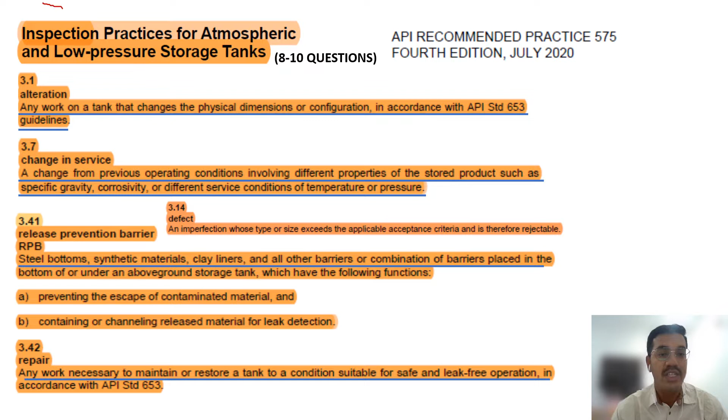First you need to understand what is meant by inspection practice. If you want to read API 650 and 653, construction and in-service inspection, before that you should read API 575, because this is the basic of API 650, in order to understand what API 653 is.

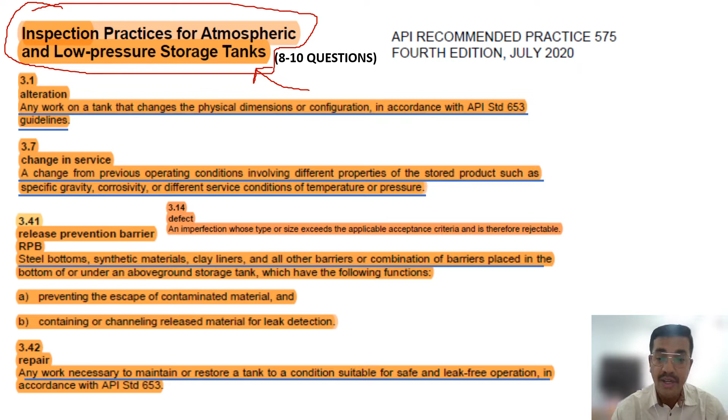If you go for other APIs like API 510, pressure vessel, you will read API 572, which is also a recommended practice.

API 653's recommended practice is API 575, which gives you guidelines and overall idea of what 650 and 653 are. Part of API 571, part of API 650, part of API 653 - everything you will find in API 575, because it gives all the info.

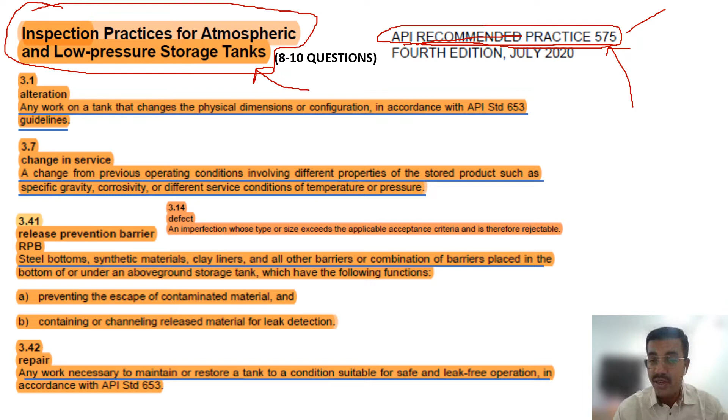Similarly for pressure vessels, API 510 has API 572. And if you go for API 570, that is piping inspection, you will find API 574. Similarly for API 580 RBI, you will find 581. So for each and every API construction and in-service inspection code, there is a recommended code also.

Similarly for API 650 and 653, the recommended practice code is API 575. It is nothing but a summary, a gist, an overall idea of a tank - what types of tanks are there, what possible defects happen in the tank, how to do the inspection of tanks.

What are the requirements? You will not find the exact values - the exact values are in 650. Construction, during construction, what will be the requirements? During inspection, in-service inspection, re-rating, reconstruction, relocating - what are the requirements? That is different, that is the exact requirements, but API 575 gives you an overall idea.

API 575 will give you an overall idea for tanks. That's why it is called recommended practice. It is not a guideline, it is not a mandatory guideline. It is a recommended practice in which you get the overall idea of API 650 and 653.

So what do you mean by alteration? Alteration we already talked about in API 650 and 653, both areas we already covered. Alteration means any work on a tank that changes the physical dimension or configuration.

Physical dimension means change of height - you add the shell, you remove the shell. Configuration - change of bottom plate - this is called alteration. Minor cutting is not called an alteration. In tank terms, you have to remember alteration is change of height or change of the bottom plate, not a cutting of an area.

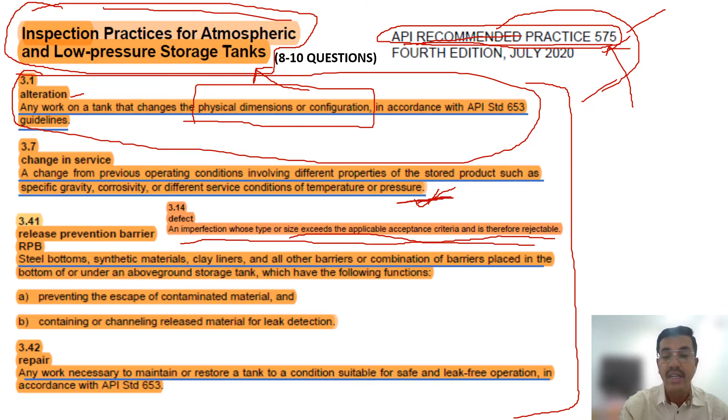So reportable indication, recordable indication - if you remember, I have already covered all these things. Reportable means an indication, maybe it is a defect, maybe not a defect. If we find the size exceeds the applicable acceptance criteria, then we call it a defect and it is rejectable. A defect is a recordable indication, but an imperfection or indication is not recordable.

So an imperfection whose type or size exceeds the applicable acceptance criteria is therefore rejectable. So release prevention barrier - this is important, sometimes it comes in the exam.

Steel bottoms, synthetic material, clay liners, and all other barriers or combination of barriers placed in or under the above ground storage tank, which have certain functions. Steel bottoms - this usually comes in open book questions.

Steel bottoms, synthetic materials, clay liners, and all other barriers - what is the function of these? Preventing the escape of contaminated materials.

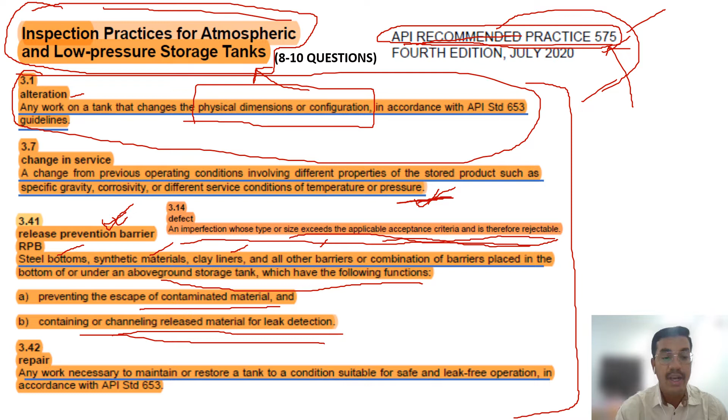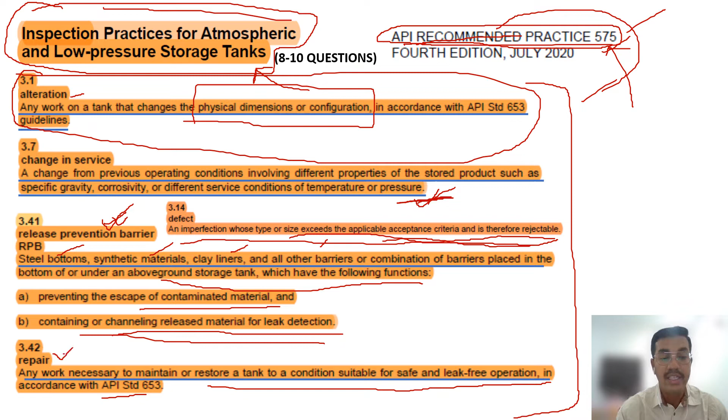Repair: any work necessary to maintain or restore to a condition suitable for safe and leak-free operation, in accordance to API standard 653, is called a repair. We didn't discuss major repair and minor repair, only repair.

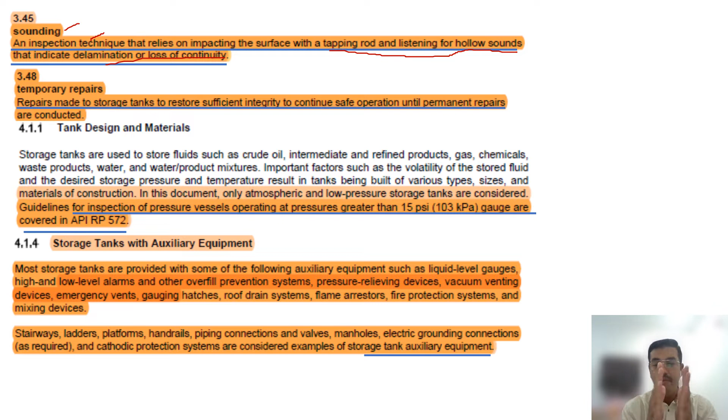Sounding is a very important term. Sounding means by hammering something you will be able to know how the sound is. If the sound is good, then maybe the product is fine - this is like an inspection way. An inspection technique that relies on impacting the surface with a tapping rod and listening for hollow sounds that indicate delamination or loss of continuity. If it is delaminated or detached, the sound will be different. If it is intact, the sound will be different. So it is an inspection technique.

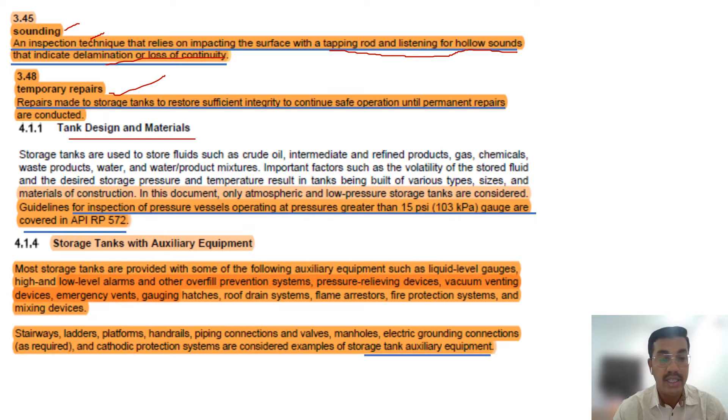Temporary repair: repair made to storage tanks to restore sufficient integrity for continuous safe operation until permanent repairs are conducted is called temporary repair. This is tank design and material. I hope you remember what the last videos said.

Guidelines for inspection of pressure vessels operating at pressure greater than 15 psi gauge are covered in API RP 572. What is 572? Guidelines - recommended practice for pressure vessels. As I told, up to 2.5 psi is API 650, then 2.5 psi to 15 psi is API 620, then more than 15 psi it is ASME section 8.

That is pressure vessels, then again it is divided into three parts: division 1, division 2, division 3. Hope you remember what I told you.

Storage tanks with auxiliary equipments. This is an open book question, usually it comes in the exam. Stairways, ladders, platforms, handrails, piping connections and valves, manholes, electrical grounding connections, and cathodic protection systems are considered examples of storage tank auxiliary equipments. It will come as an exam question - what are the auxiliary equipments? So keep this in mind.

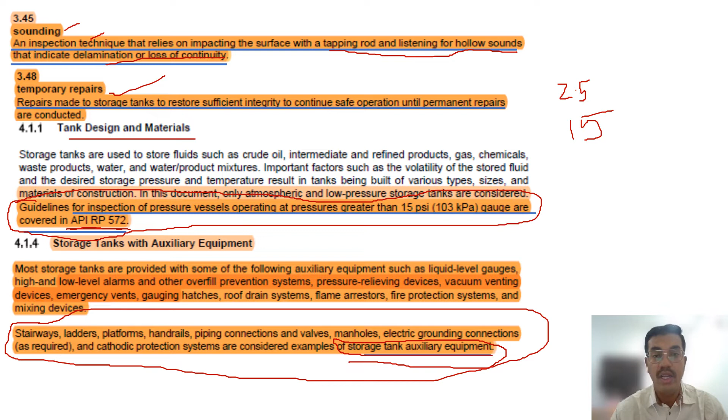Use of atmospheric storage tanks: atmospheric storage tanks in the petroleum industry are normally used for fluid having a true vapor pressure less than atmospheric pressure. If it will be more than atmospheric pressure, then you cannot handle the pressure - we cannot call it API 650 or API 620.

If it is more, then we need a pressure vessel, not a tank. Vapor pressure is the pressure on the surface of a confined liquid caused by the vapor of that liquid. Vapor pressure increases with increasing temperature. Crude oil, heavy oil, gas oil, furnace oil, naphtha, gasoline, and non-volatile chemicals are usually stored in atmospheric storage tanks. This is not a question, this is only for your information.

Cone roof tanks - this is usually an open book question. The most common type of atmospheric storage tank is the fixed cone roof tank. This is a closed book question too: the most common type of atmospheric storage tank is fixed cone roof tank.

Fixed cone roof tanks are typically up to 300 feet diameter and 64 feet height, although larger diameter tanks have been built. These roofs are normally supported by internal structural rafters, girders, and columns - I hope you remember rafters, girders and columns - but can be fully self-supporting in smaller diameters, typically 60 feet diameter or less, with self-supporting aluminum dome roofs.

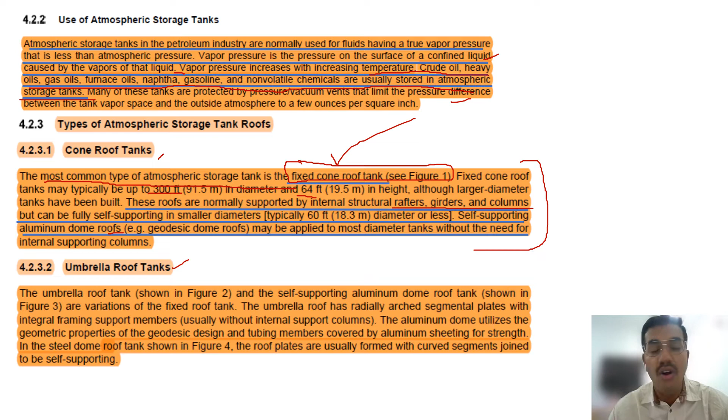Umbrella roof tanks, as I told, API 575 gives you an idea, a recommended practice - before construction under API 650 you have to read 575. It will tell you the types of tanks, how many types of roofs there are, the expected causes of defects, and how to do the inspections - all these things are covered in API 575.

Umbrella roof tank: the umbrella roof tank and the self-supporting aluminum dome roof tanks are variations of the fixed roof tanks. The umbrella roof tank has radially arced segmental plates with integral framing support members. The aluminum dome utilizes the geometric properties of the geodesic design, with tubing members covered by aluminum sheeting for strength.

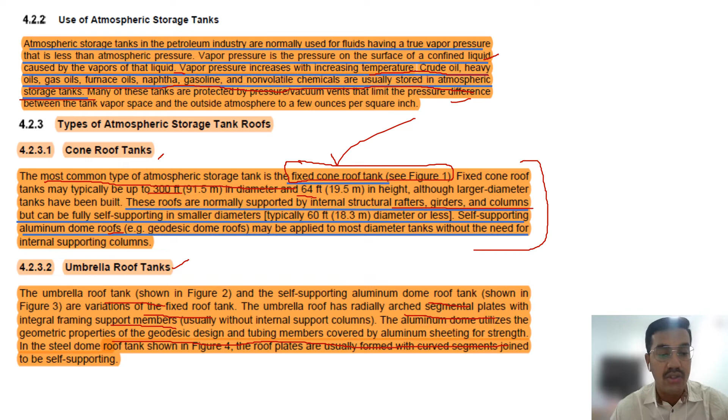External floating roof tanks: the floating roof tank is another common type of atmospheric storage tank. The floating roof tank is designed to minimize filling and breathing losses by eliminating or minimizing the vapor space above the stored liquid. This came once in the open book question. The external floating roof is no longer permitted under API 650 Annex C - this is again one question.

Such roofs have no reserve buoyancy and are susceptible to sinking in service. External floating roofs, okay. Internal floating roofs where there is a floating roof and on top of it there is a fixed roof, that is called internal floating roof tanks, okay.

If you remember API 650 we discussed everything. Another type of tank has both a fixed roof and an internal floating roof. There is a fixed roof as I told you and one internal floating roof. The fixed roof is usually a supported cone or dome of steel or aluminum. This is called internal floating roof tanks.

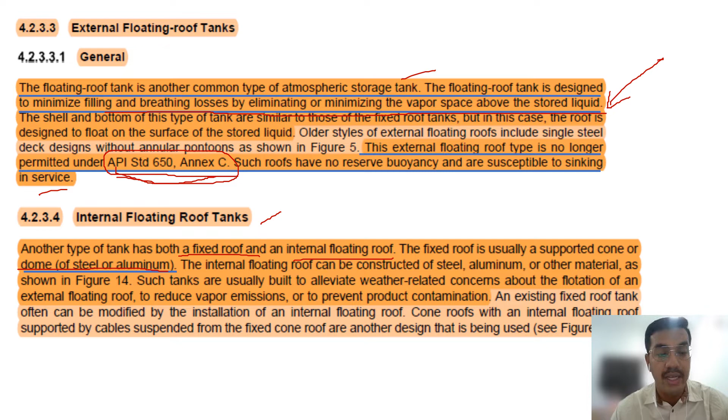Low pressure storage tanks, already I discussed with you this one. Low pressure storage tanks are those designed to operate with pressure in their gas or vapor spaces exceeding 2.5 psi, as permissible in API 650, but not exceeding 15 psi, which is the maximum limitation of API 620. So as I told, up to 2.5 psi it is API 650 and up to 15 psi it is API 620. Above that you have to use pressure vessels, okay, ASME Section 8 Division 1, 2 and 3, hope you remember.

Low pressure storage tanks are used for the storage of the more volatile fluids having a true vapor pressure exceeding the pressure limit of API 650 but not more than 15 psi. Light crude oil, gasoline, blending stock, light naphtha, pentane, blah blah blah, all these are used for this pressure. Okay, usually this comes in open book exam, so keep this in mind.

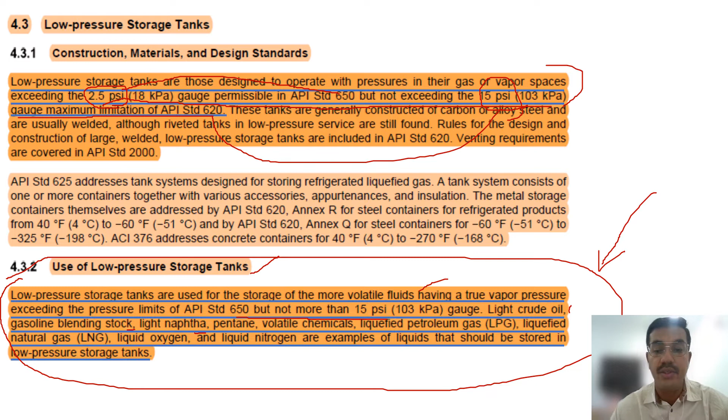Cylindrical tanks, okay, it is very rarely used. Tanks that have cylindrical shells and cone or dome roofs are typically used for pressure less than about 5 psi. Okay, this is closed book. Sometimes the bottom may be flat or have a shape similar to the roof. Hold-down anchoring of the shell is generally required for pressure above 5 psi gauge. Hemispheroid, spheroid and noded spheroid tank types are commonly used.

Reason for inspection and cause of deterioration. The basic reasons for inspection are to determine the physical condition of the tank and to determine the type, rate and cause of damage mechanism and associated deterioration. This can be an open book question.

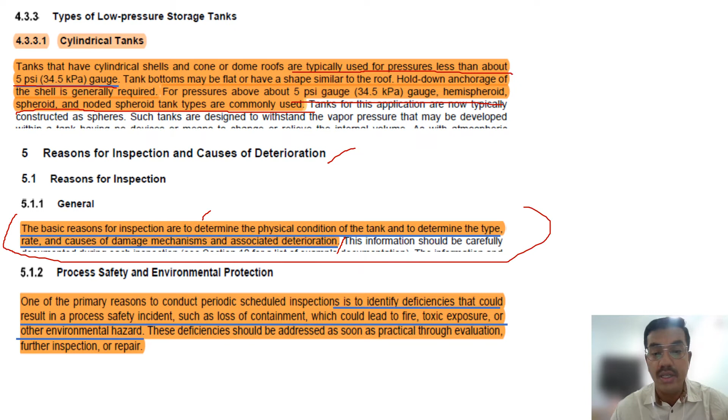Process safety and environment. One of the primary reasons to conduct periodic scheduled inspection is to identify deficiencies that could result in a process safety incident, such as loss of containment, which could lead to fire, toxic exposure, or other environmental hazards.

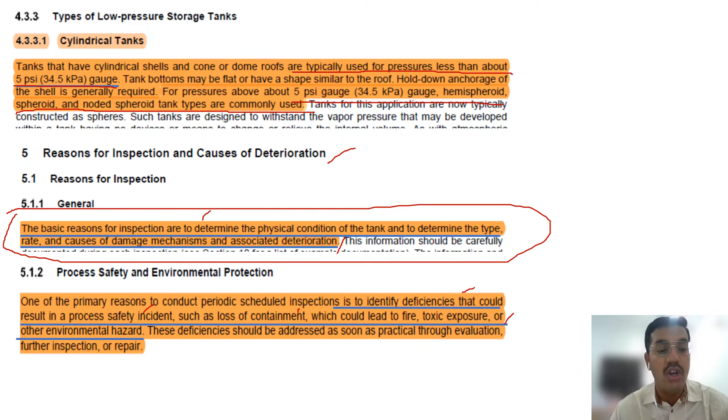Regulatory requirements. This is a question, last time it came, I think 2 years back or somewhere I saw in a question bank. In general, regulatory bodies require compliance with the industry standard or code, or adherence to recognized and generally accepted good engineering practice, RAGAGEP, when performing any inspection and repair activities. This is the regulatory requirements.

Emission control. In the United States, the Environmental Protection Agency, EPA, has issued a spill prevention, control and countermeasure rule that covers most petroleum storage facilities. This is one of the emission control requirements.

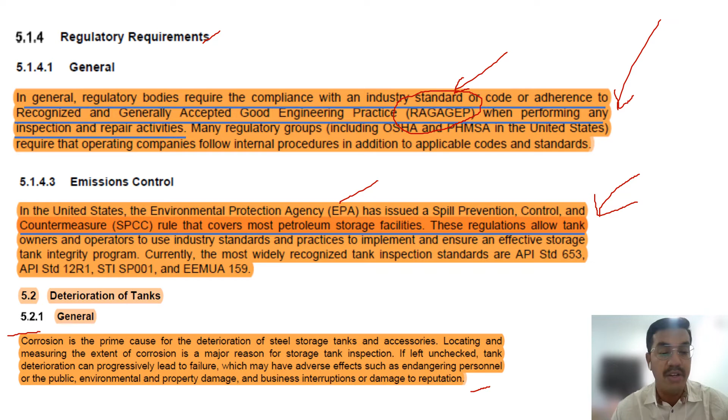Deterioration of tanks. This is for information. Corrosion is the primary cause of deterioration of steel storage tanks and accessories. Locating and measuring the extent of corrosion is a major reason for storage tank inspection. If left unchecked, tank deterioration can progressively lead to failure. If you remember, we have inspection frequency, we have already read it, okay. I hope you remember. You will get questions from inspection frequencies, okay, API 653.

Atmospheric corrosion. As I told, it will give you the overall idea - how many types of tanks are there, what are the roof types, what are the inspection requirements, then what are the causes of internal and external corrosion. So all this we read in API 571. Atmospheric corrosion can occur on all metallic tank components exposed to the atmosphere. The type of tank, construction details and environmental conditions can all affect the location, extent and severity of the external corrosion. If you remember, in API 571 we read it.

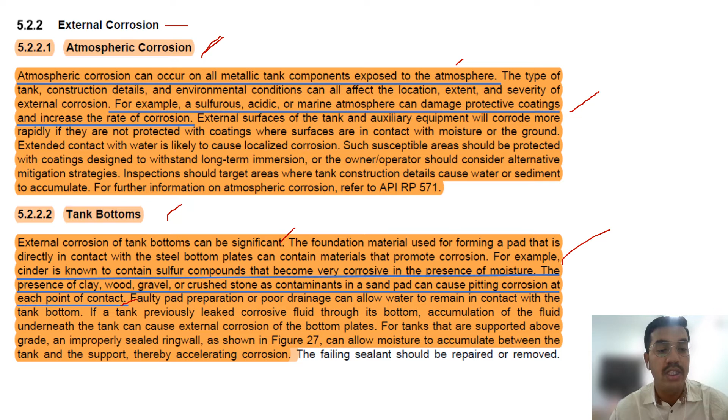Which environment has the most severe corrosion? Marine environments, 20 mpy, okay, 20 mils per year. Tank bottoms - external corrosion of tank bottoms can be significant. This line is important: for example, cinder is known to contain sulfur compounds that become very corrosive in the presence of moisture. The presence of clay, wood, gravel or crushed stone as contaminants in a sand pad can cause pitting corrosion at each point of contact. So this is for the tank bottom, okay.

Riveted tanks may have niches where concentration cell corrosion can occur. Leaks at the seams of riveted tanks can cause failure to the external coating, allowing external corrosion to develop.

So these are the expected failures which will come. Leaks are primarily the result of corrosion but can occur at improperly welded or riveted joints.

These are not so important and I don't see any question from there. Brittle fracture, for your knowledge, already we read it last time. Brittle fracture as a sudden loss of content of the tank can result in injuries to persons and extensive damage to equipment in surrounding areas is called brittle fracture.

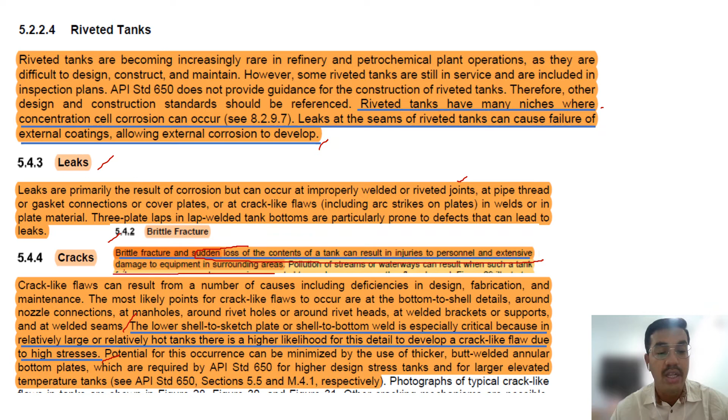So crack - the lower shell to sketch plate or shell to bottom weld is especially critical because of relatively large or relatively hot tanks. There is a higher likelihood of this detail to develop a crack-like flaw due to high stress. So these are the explanations for the crack, why crack happens.

Settlement - we spent a lot of time in API 653 when we read it, how to measure the settlement, what are the settlement requirements, what type of settlement is there. I hope you remember and are still practicing those settlement, because settlement is the most important for a tank.

For a tank, the shell plate is not so important. For a pressure vessel, the shell plate is important. For a tank, the bottom plate is important. Pressure vessel, there is no bottom plate. So for tank, the bottom plate is important, and bottom plate is related to settlement. So that's why settlement you have to read it very carefully.

Large or uneven amounts of settlement can cause nozzles with attached pipings to become overstressed and possibly deformed or cracked, or interfere with the normal operation of floating roofs. Significant amounts of uneven settlement should be a cause of concern and for further investigation.

Edge settlement in tanks with cone down bottoms can trap BS&W, resulting in bottom and lower shell corrosion in the area. These are the requirements of settlement. They just explain why settlement happens. These are all explanations of what you are seeing, a brief explanation of why this thing happens.

Inspection record and software. Inspection plan of tanks can be maintained in a spreadsheet, hard copy files, or proprietary inspection software database. Developing inspection plan - an inspection plan is often developed and implemented.

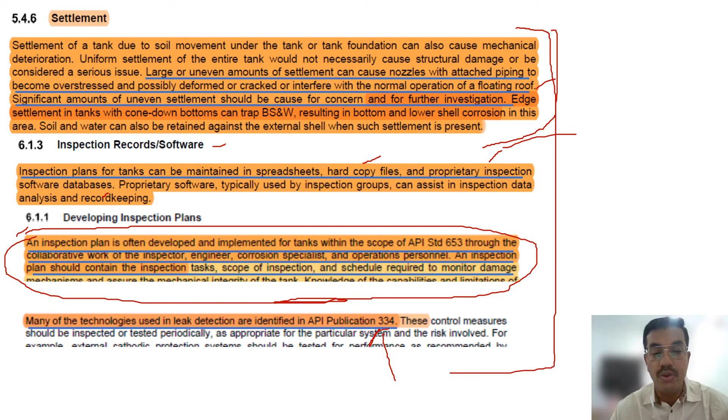An inspection plan is often developed and implemented for tanks within the scope of API 653 through the collaborative work of the inspector, engineer, corrosion specialist, and operational personnel. These are the four persons.

An inspection plan should contain the inspection task, scope of inspection, and schedule required to monitor damage mechanism and ensure the mechanical integrity of the tank. Knowledge of the capability and limitations are well maintained. So this is question 6.1.1.

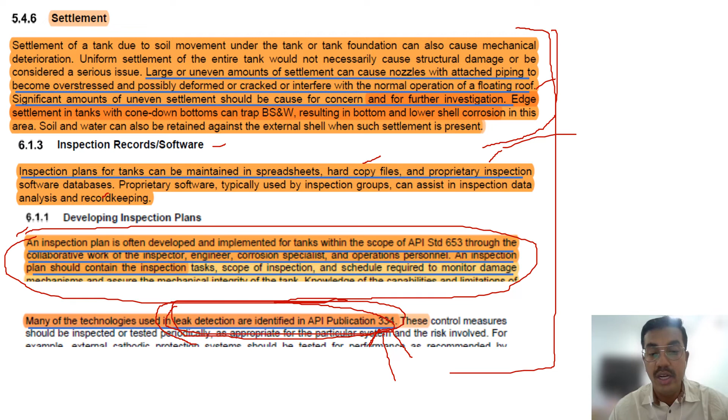Many of the technologies used for leak detection are identified in API publication 334. Leak detection is API publication 334. Usually what happens, for the code names you will find one or two questions - what is API 334, what is API 580, what is API 579, what is 581, what is 575, what is 572. So you will find one question from all this. So this is one of the important API publications - 334 is for leak detection.

Probability of failure assessments - identifying and evaluating potential damage mechanisms, current tank condition, and the effectiveness of past inspections are important steps in assessing the likelihood of tank failure. The likelihood assessment should consider all forms of degradation that could reasonably be expected to affect the tank in a particular service. So these are not so important, but I put it for your information.

Documentation - any RBI assessment should be thoroughly documented in accordance with API RP 580. RBI is 580. What is 579? FFS. What is the full form of FFS? Write in the comments.

Inspection plan - after an RBI assessment is conducted, the results can be used for the establishment of an inspection plan and better defining the following. So these are the inspection plan requirements.

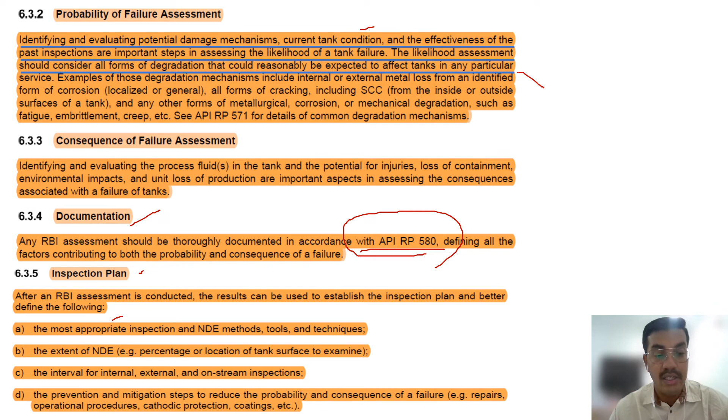Inspection timings - I hope you already remember the inspection timing, as I told you. Please go to API 653 and practice those. This is very important, and you will find many questions for this one. You will not find any question from API 575 for the inspection timing, but for climate events, maybe you can find one question.

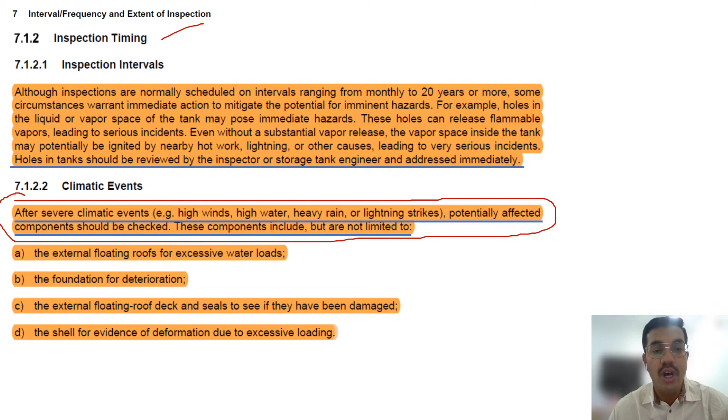Inspections are normally scheduled at intervals ranging from monthly to 20 years. Monthly inspections are done by the operator. Some circumstances warrant immediate action to mitigate the potential for imminent hazards.

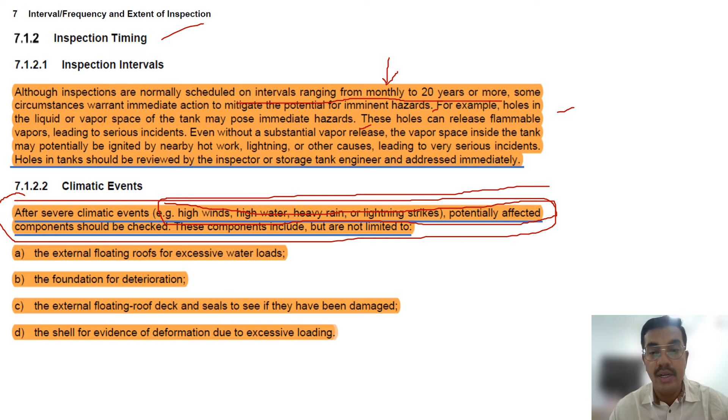For example, holes in the liquid or vapor space of the tank may pose immediate hazards. There are standards for this, even though it is covered in API 653, if you find some immediate action is needed, you have to take action. Climate events: after severe climate events such as high wind, high water, heavy rain and lightning strikes, potentially affected components will be checked. These are the routine checks. Besides routine check, if something happened due to climate events, you have to check all those things. It is common sense.

Seismic events means earthquake. After seismic events that were significant enough to have impacted the integrity of the component of the tank, floating roofs and associated tank pipings, inspections shall be performed.

Leaks: if a leak is detected during an in-service inspection, a storage tank engineer should investigate to determine whether the leakage is caused by internal or external corrosion or some other condition that can be corrected while the tank remains in service.

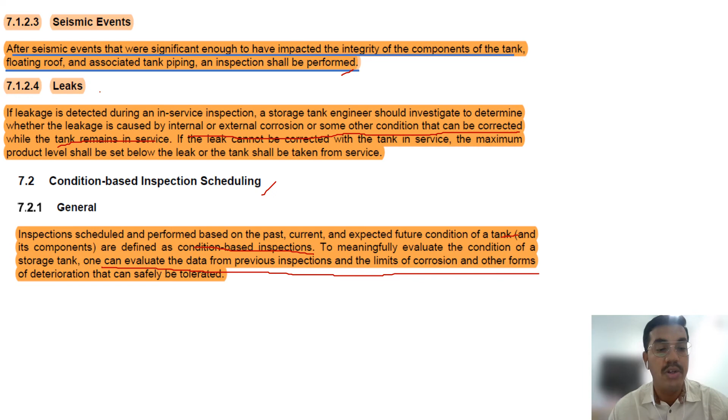Condition-based inspection scheduling: inspection schedules are performed based on the past, current and expected future condition of the tank as defined in condition-based inspections. To meaningfully evaluate the condition of the storage tanks, one can evaluate the data from the previous inspection and the limits of corrosion and other forms of deterioration that can safely be tolerated.

Remaining life evaluation. I believe you already practice remaining life in API 653. Remaining life is found by T actual and T required. T actual minus T required, divided by the corrosion rate. So remaining life is found from there.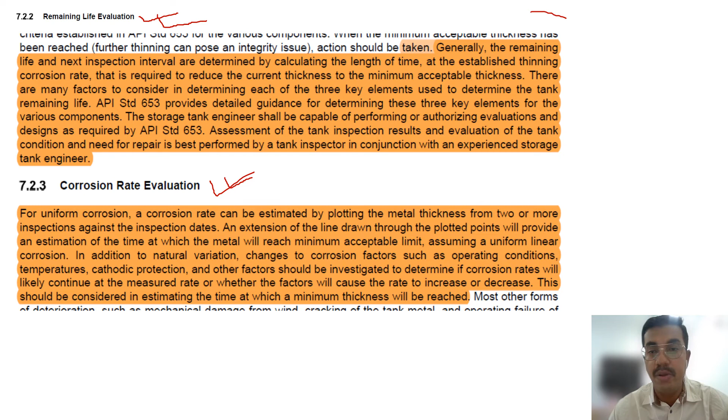Corrosion rate evaluation is also given. The corrosion rate is T previous minus T actual, divided by the years. So we find the corrosion rate. These are simple calculations, but you will not find any question from API 575 for these two. There are questions 100% from API 653 for corrosion rate evaluation and for remaining life.

Product consideration: storage tank shell plate thickness is normally calculated to contain a fluid of a desired specific gravity, usually water for the hydrostatic test in the case of atmospheric storage. If actual service conditions differ from those contemplated in the design, for example the stored liquid, this is not so important, you will find the shell thickness plate would be designed accordingly if the specific gravity is greater than 1. What is the specific gravity of water?

It is 1. Then a hydrostatic test condition does not reflect the loading of the product. If the specific gravity is greater than 1, then the hydrostatic test is not considered. Lower, we can do it; higher, we don't allow.

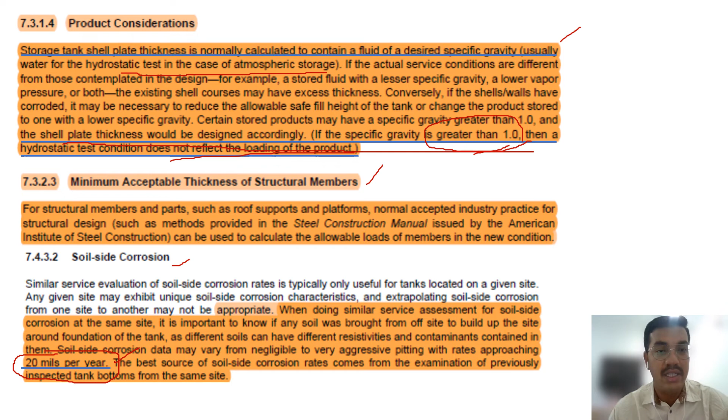Minimum acceptable thickness of structural members, this is for info. Soil side corrosion: here it mentions if there is soil side corrosion, there may be a 20 mils per year corrosion rate. It can come, but it is not so important. This is an important topic - note it, you will find it in an open book question.

Ladders and stairways should be examined carefully for corroded and broken parts. The condition of the ladder, vertical or rolling, staircase parts and handrails should be checked by visual inspection and, if appropriate, by mechanical means such as pinging with a hammer to determine whether their parts are safe for continuous use. Staircase and other access details should be evaluated per OSHA regulation 29 CFR part 1910 or other applicable safety standards.

Platform and walkway inspection is also one of the important topics. Low spots where water can collect should be checked carefully because corrosion may be rapid in such areas. Drain holes can be drilled in the area to prevent future accumulation of water. So if there is a platform and water accumulation, make a drill hole so that the water will drain, or if it stocks in that area, it can corrode that area.

Anchor bolt inspection is one of the important topics. The condition of anchor bolts is usually determined by visual inspection. The area should be cleaned by scraping, picking, wire brushing, etc. to determine the extent of the corrosion. So this is anchor bolt inspection.

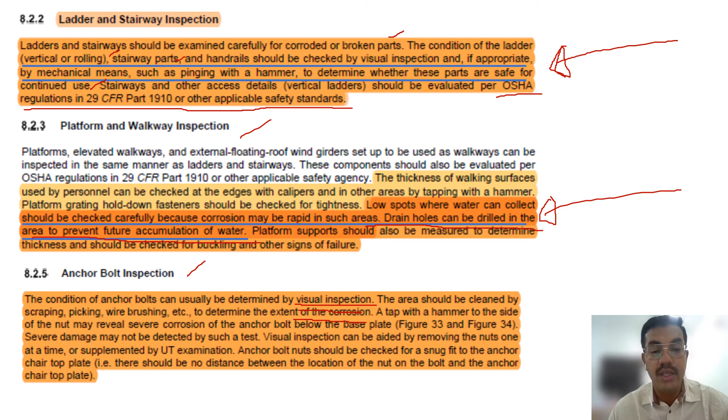Grounding connection inspection - if there is any grounding, you have to check it very carefully. The total resistance, this is a closed book question once it came in the exam. The total resistance from tank to earth should not exceed approximately 25 ohms.

Another important code is API RP 2003, which provides information concerning the grounding of tanks to prevent ignition from static electricity, lightning strikes, and stray electric currents.

Protective coating inspections - the condition of the protective coatings on a tank should be adequately established during inspection. Rust spots, blisters, peeling, and cracking of the coating due to lack of adhesion are all types of common coating failures.

Inspection of CUI, corrosion under insulation, and the condition of insulation - these are some requirements mentioned here which are not so important, for your info you can read it. But this CUI question in API 575 is a must question, so keep it in mind.

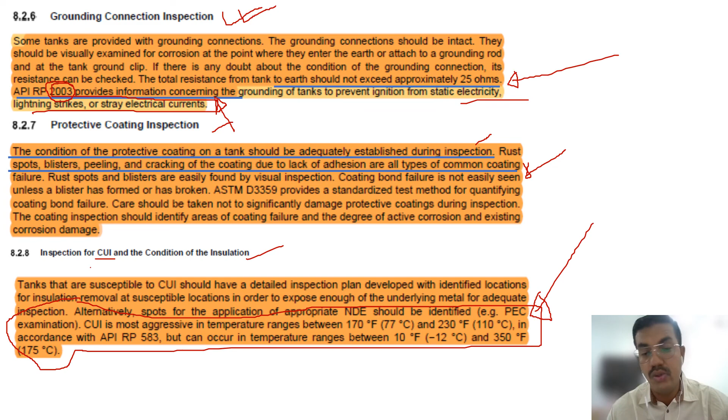Another type of cracking is caustic cracking, along with stress corrosion cracking (SCC). The most probable place for caustic cracking to occur is around the connection of internal heating units or coils. If there are internal heating units and coils, caustic corrosion cracking may occur. This type of deterioration is manifested by cracks that start on the inside of the tank and progress through to the outside.

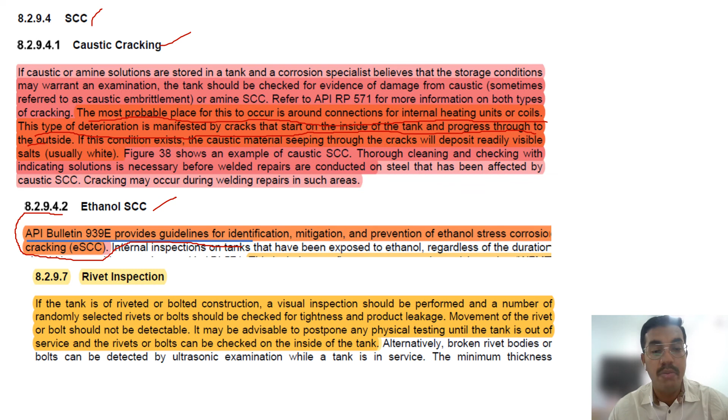Ethanol stress corrosion cracking - this is a question, remember it. API Bulletin 939E provides guidelines for the identification, mitigation, and prevention of ethanol stress corrosion cracking.

Rivet inspection - if the tank is of riveted or bolted construction, a visual inspection should be performed and a number of randomly selected rivets or bolts should be checked. This is for info, riveted inspection content - you can read all this, it will enhance your knowledge, but it is not in the exam questions.

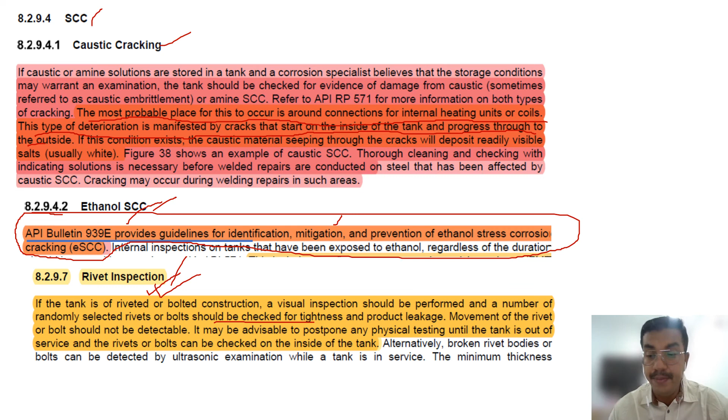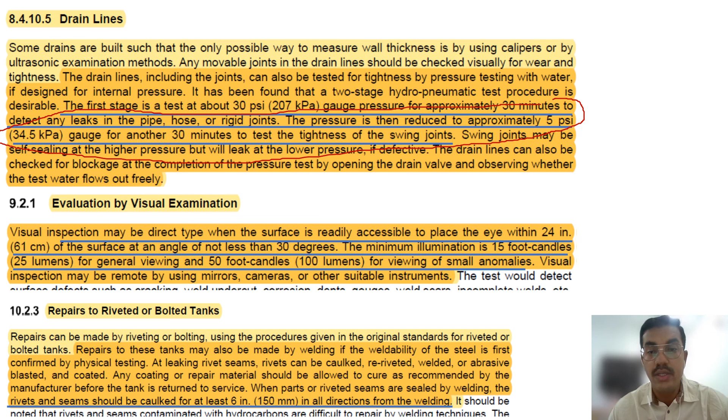Drain lines - this is usually a question, open book. These two questions usually come in open book: evaluation at the first stage at least about 30 psi. Drain lines, how you have to make them, because some areas have water stacking - the requirements for drain lines are mentioned here. Approximately 30 minutes to detect any leak in the pipe, hose, or rigid joints, then the pressure is reduced to approximately 5 psi for another 30 minutes to test the tightness of the swing joints.

Evaluation - this one is important, keep it in mind. Visual inspection may be direct type when the surface is readily accessible to place the eye within 24 inches of the surface at an angle not less than 30 degrees. The minimum illumination is 15 foot-candles or 25 lumens for general viewing, and 50 foot-candles or 100 lumens for viewing for small anomalies.

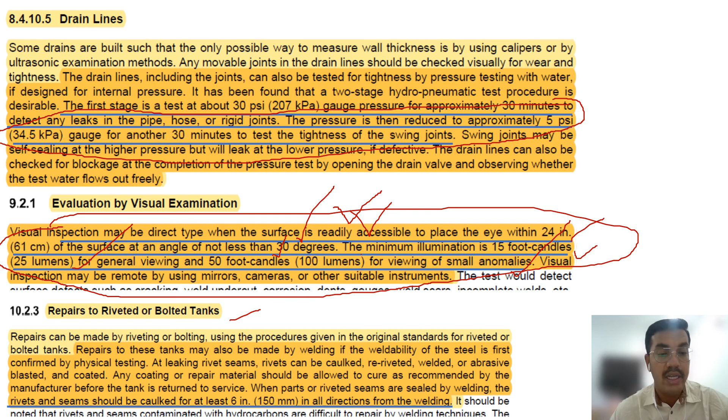This is the recommendation for repairs of riveted or bolted tanks - not so important. Then bottom repairs - you will find one closed book question for this bottom repair. Bottom is always very important. Whenever you read API 653, 650, you have to focus more on bottoms - bottom is the more important part.

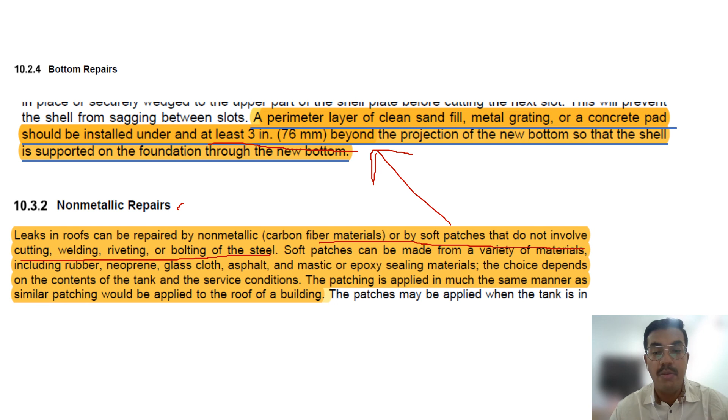Non-metallic repairs - leaks in roofs can be repaired by non-metallic carbon fiber materials or soft patches that do not involve cutting, welding, riveting, or bolting of the steel. Soft patches can be made from a variety of materials including rubber, neoprene, glass cloth, asphalt, mastics, and epoxy sealing materials. The choice depends on the content of the tank and the service conditions.

That's all, friend, for API 575. You will find 6 to 8 questions or maybe more, sometimes it varies - API 575 questions always vary. Sometimes it's 10 questions, sometimes 6, but most of the questions are open book. Highlight the points where I told you these are open book questions, and you will definitely find more than 5 questions in the exam.